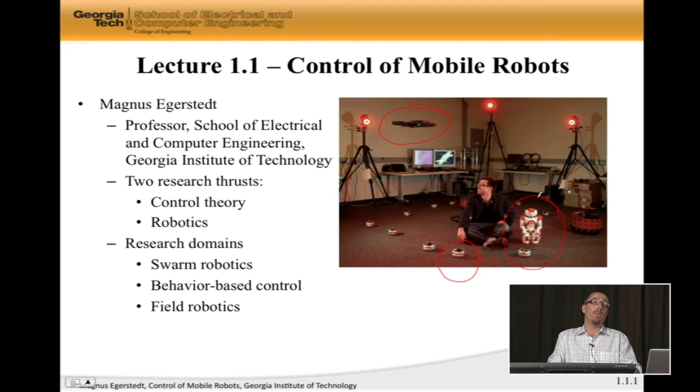Here is an example of what I do, and I'm showing this video because a lot of the things we're going to learn in the class are present here. In this case, there are 15 mobile robots on the ground, and together they have to solve a coordinated control problem. What they have to do is spell GRITS, because I'm the director of the GRITS lab, which stands for the Georgia Robotics and Intelligent Systems Lab.

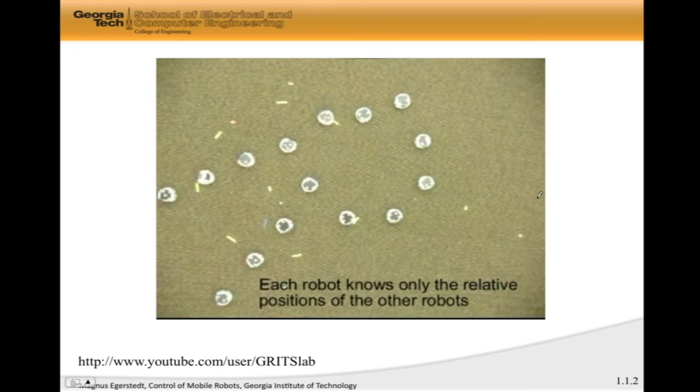Talking about the robots, what they need to do is use the information available to them and come up with control strategies based on that. They have to figure out where they should go in these particular formations, how they should get there. They also need to deal with the fact that the robot dynamics are surprisingly complicated, and they should not slam into each other. They should also be able to survive disturbances.

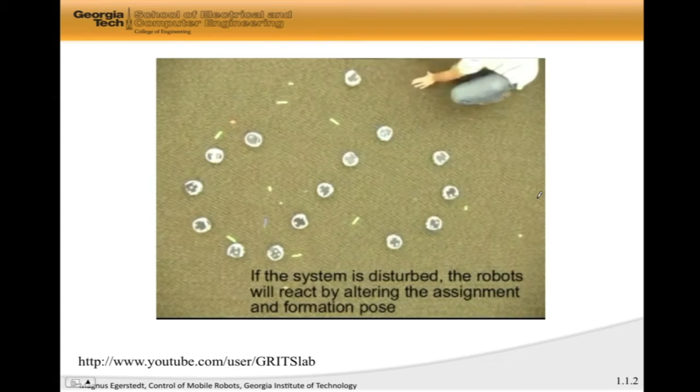So Ted here, who's a former master student in the lab, is actually messing with the system, and the controllers have to be able to overcome these disturbances and actually be robust to what's going on.

Having said that, what we are going to do in the course is develop control theory, this general mathematical framework for making systems do useful things. Then we're going to take robotics as the main application domain, and we're going to couple robot models and robot problems to what we develop on the control theory side.

That's going to result in a number of different mobility controllers. And we're also going to discuss a plethora of different application domains found in robotics where our controllers are useful.

I do want to point out, which is almost as useful, what's not in the course. This course is not a course on AI, in the sense that the robots aren't going to reason at a high level about where they should be going. Instead, someone has told the robot where it should be going, and it's our job to make it go there.

It's also not going to be a course on perception, in the sense that we're going to assume that the measurements we get are already reasonably good, and they tell us roughly what it is that we're interested in and need to know. We're also not dealing very much with the actual design of robots. A clever mechanical engineer has already built it for us, and it's our job to make this design do what it is that we want it to do.

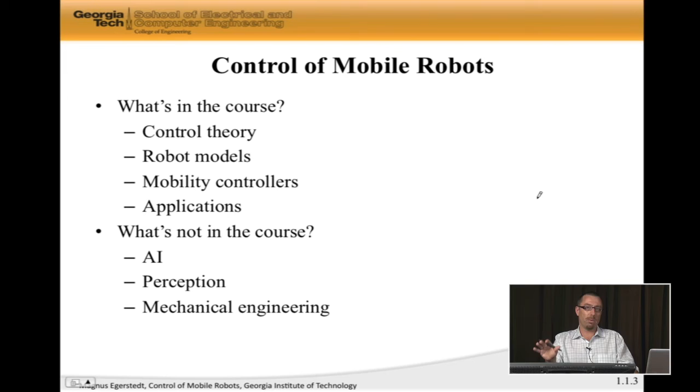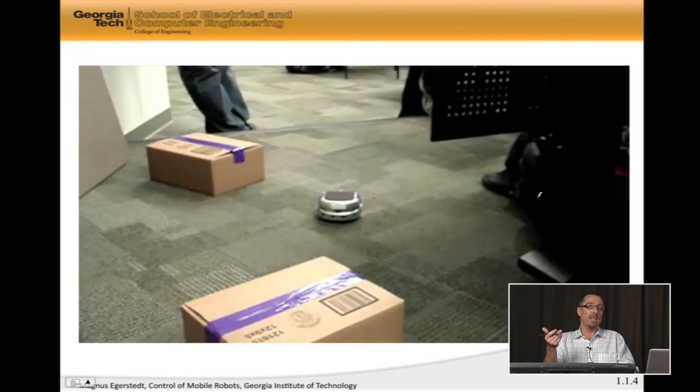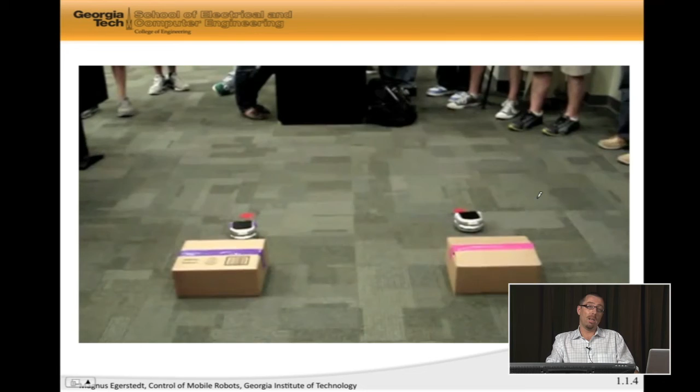I want to end with showing a rather amusing video. This is a course that I taught on campus at Georgia Tech, where part of the course was to design controllers, very rudimentary controllers, for making these robots go to goals without actually running into obstacles. We had students actually compete, not at the AI level or the perception level, but purely on the controls level, to achieve certain tasks.

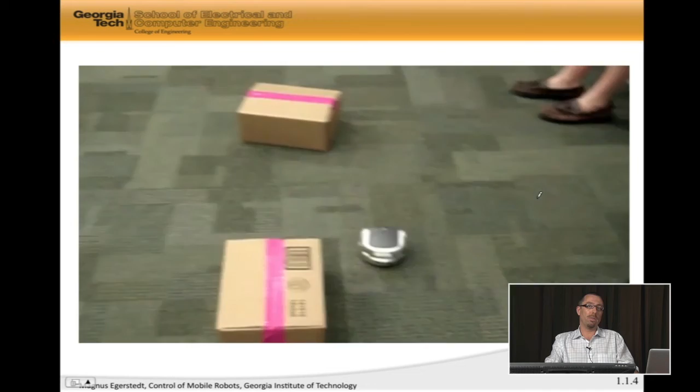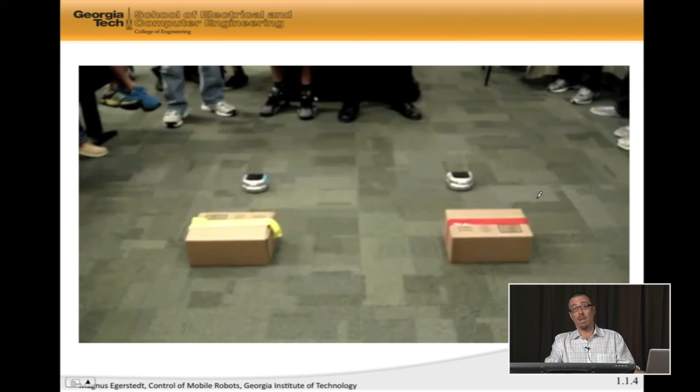Here we have another example of two other teams that are now competing against each other. You will see that one robot is, again, a little over-aggressive, the one on the right. And in fact, it's going to be so aggressive that it loses track of what it is that it's doing. So this would be an example of a maybe not so successful control design.

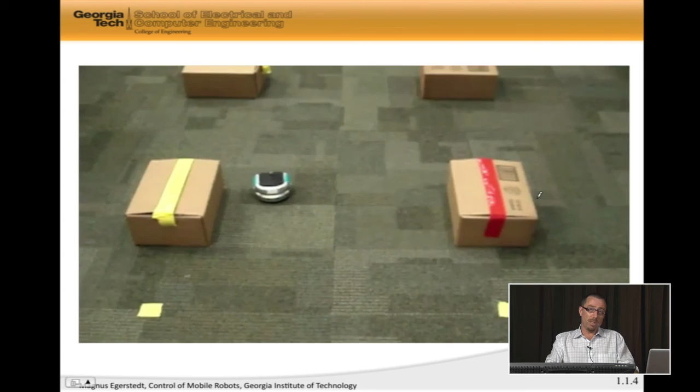We will do this in this course. Now, I realize that I can't ship one of these robots to every one of you, so instead we're going to do this in the studio. We're going to together develop the control algorithms that result in, this would be the final race in this class, take a look at Team Purple.

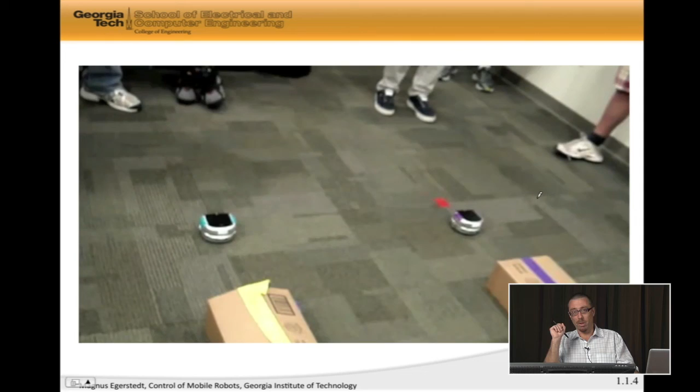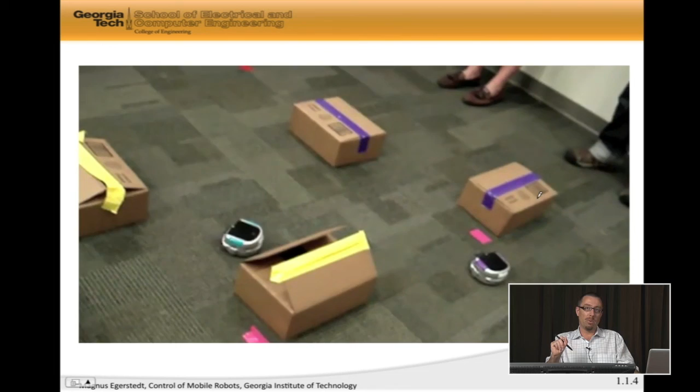This controller is awesome. It's very deliberate. It oscillates very little. There is very little overshoot. It's moving fast. And what's going on there is just a small and slightly more informed control design. So Team Purple won in this case.

And with that, I would like to conclude this first introductory lecture to the course.